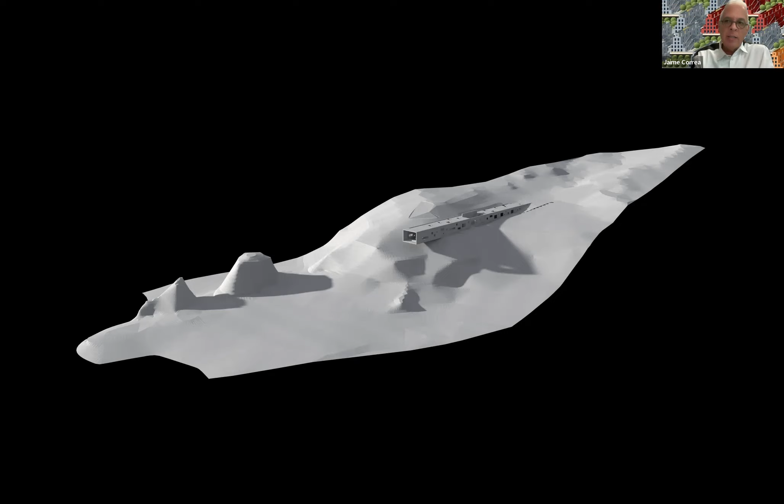Not really—I prefer to inhabit a structure than to structure a room, for example. In this case, a first project I'll show, which was not built, is a house that is, in the first instance, its structure. This is an unbuilt project, and the project is basically a structure.

And we could say that architecture is its own structure before it becomes architecture. So the architecture is really the structure before it really becomes a piece of architecture.

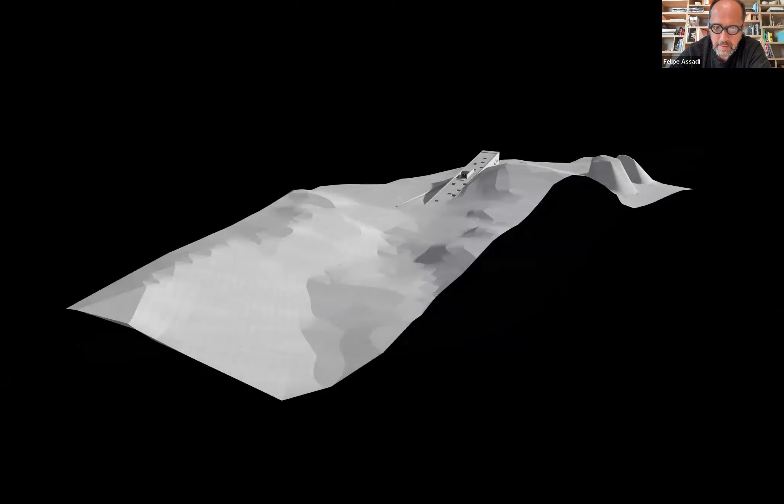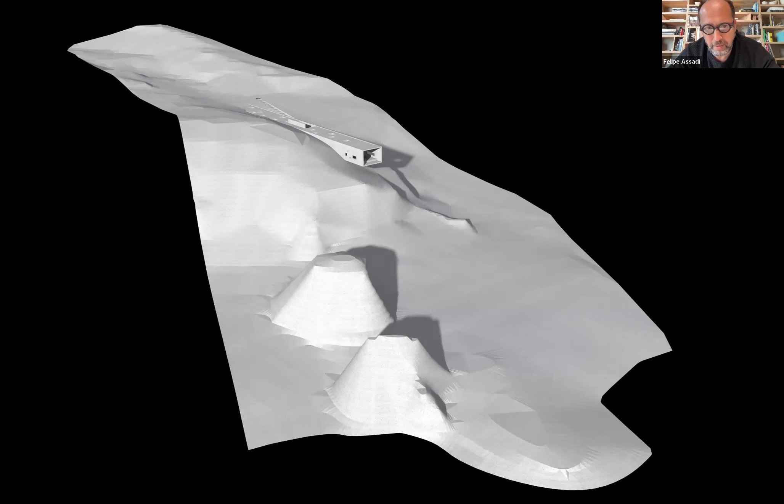This piece is made of 4 concrete faces that, joined together, form a great beam that embeds itself in the earth and flies over the landscape. Otherwise, a series of pillars would have been needed to support it, but since it is a structural beam in itself, it behaves as a single element—a piece of architecture with 4 faces of concrete that is also a beam embedded in the land, cantilevered over the geography without columns.

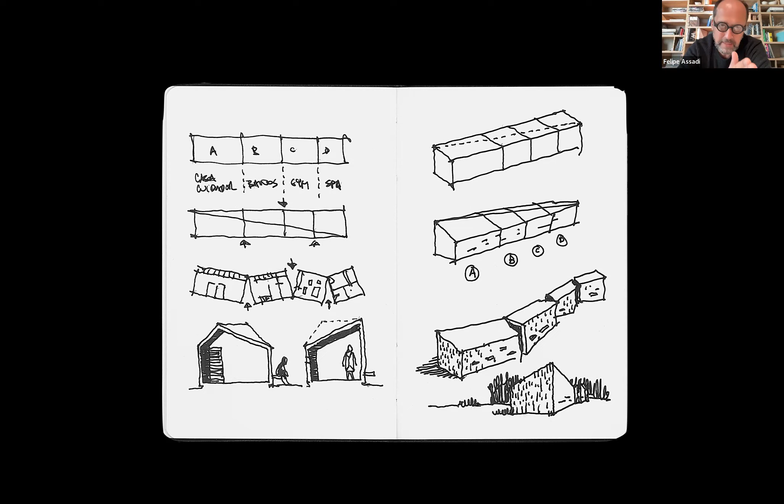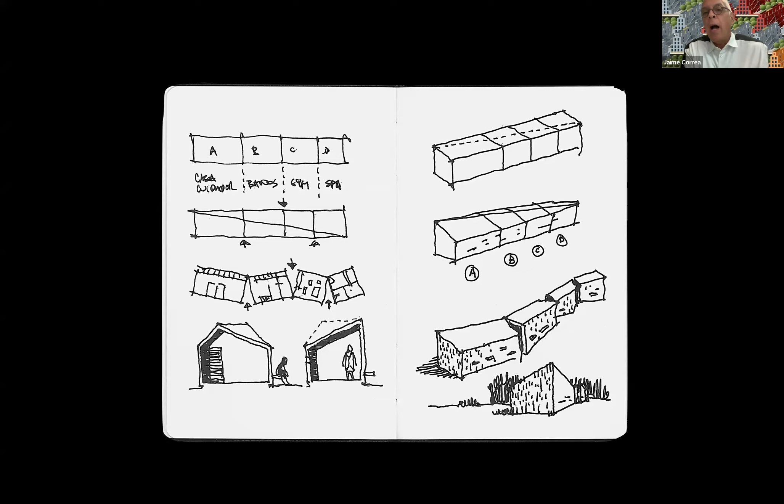Para poder entender el concepto de una sola casa con 4 cosas distintas, planteamos un pabellón con un techo en diagonal y luego cortamos 3 veces este pabellón y giramos cada parte para generar el acceso a cada una de las áreas. So there's one single house, and to be able to have it with 4 different functions, we inclined the roof and rotated 4 elements. We did 3 cuts on the general form, and through one of those cuts is how you access each one of the 4 functions.

Cubrimos el proyecto de un material inventado, diseñamos una palmeta de concreto con fibra, con un shape que hicimos para que la luz del sol en su recorrido fuese también tiñendo de sombras estos movimientos. We covered the roof with a material of our own invention, which is concrete with fiber. The result was that when the light hits the objects, it produces shades and shadows that are quite interesting.

Solo en el lugar del corte quedó el concreto rugoso, digamos, como estaba, para acentuar la idea de que fue cortado como si fuese un cuchillo y separado. So only in the cuts, we kept the concrete as it was supposed to be, as if a knife would have severed each one of these volumes.

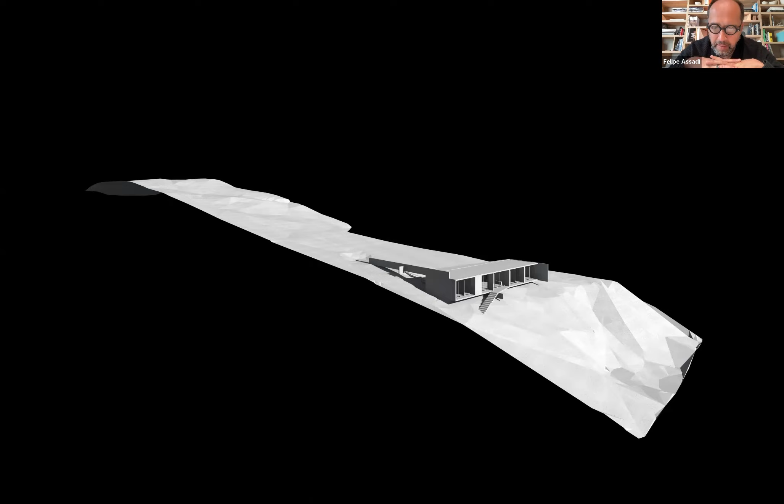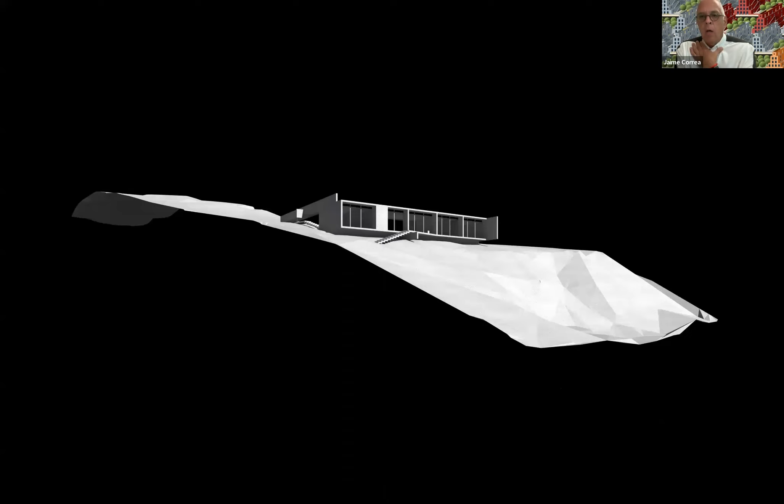This is another house in the north of Chile, very close to the ocean. The approach to the house is essential: when you arrive, you come through an esplanade, but there's a rock that drops abruptly, which gave us the siting for the house.

Entering the house was not as important as climbing onto it to observe the ocean from this unique place. There we understood that everything was connected: the roof was the lookout point for the sea, and it had to be as important as the interior of the house. So the roof suddenly became this fabulous terrace for sightseeing the geography, and the roof became almost more important than the house.

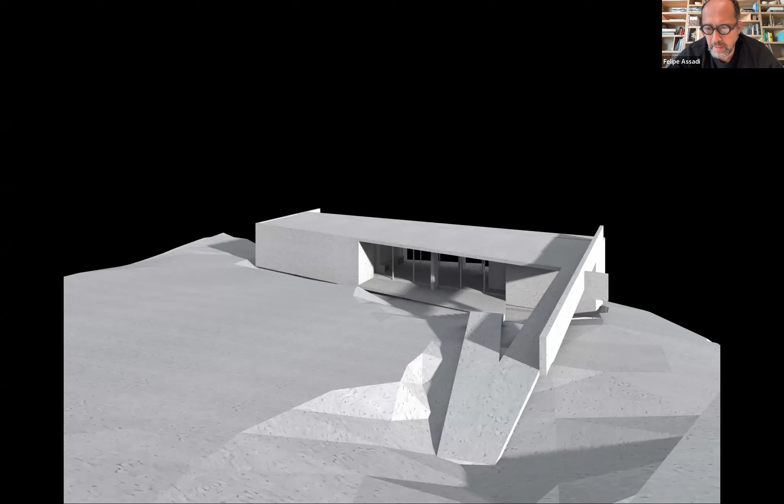Just as the places had equal importance, the elements that made them possible also had to have equal importance. In the same manner that the roof and the rest of the house had equal importance, all the elements we put into the house should also have that same importance.

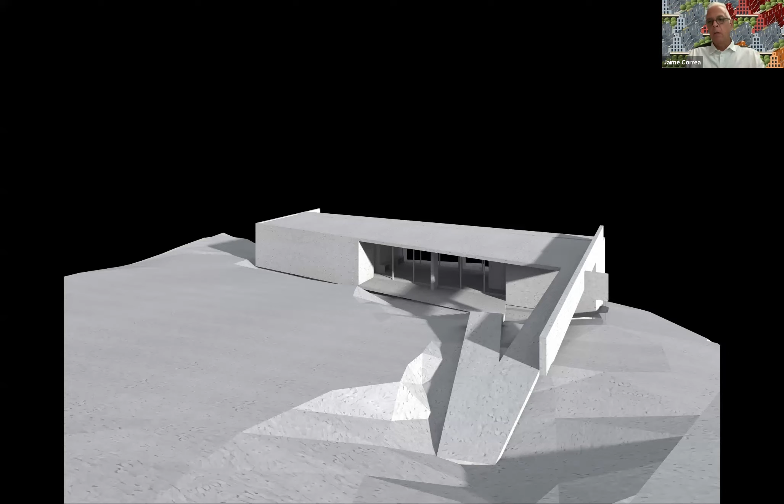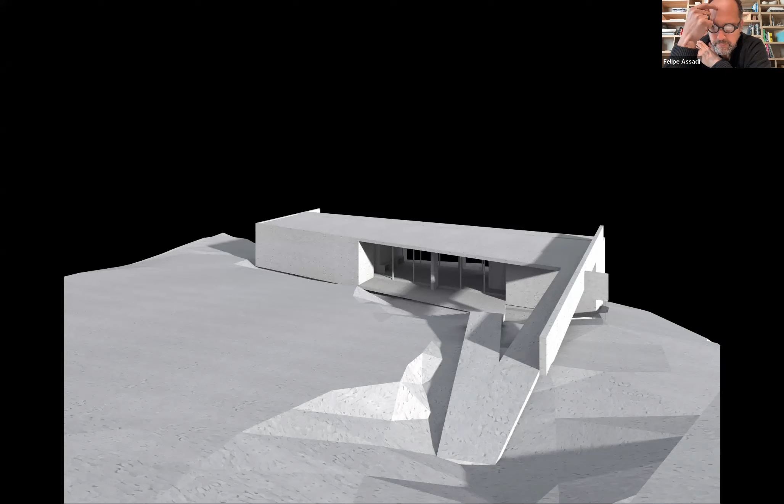So we sought a continuum between the access, the roof, and the house floor, and a common thickness for all the elements. That is, the roof slab and the floor slab had to have the same thickness, as did the bridge, the wall, and the stairs. We looked for commonalities in all the elements, deciding that the thickness of every element should be the same — the roof, the floor, the stairs, the ramp — everything had the same thickness.

But the structure does not always behave the same way for equal elements. A slab does not work the same as a wall.

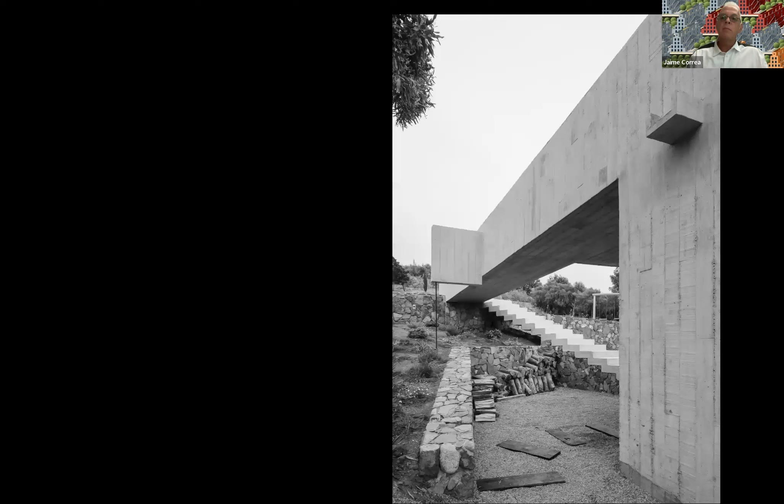So finally, the elements of the whole house are like a ribbon that go throughout the house and surround it completely.

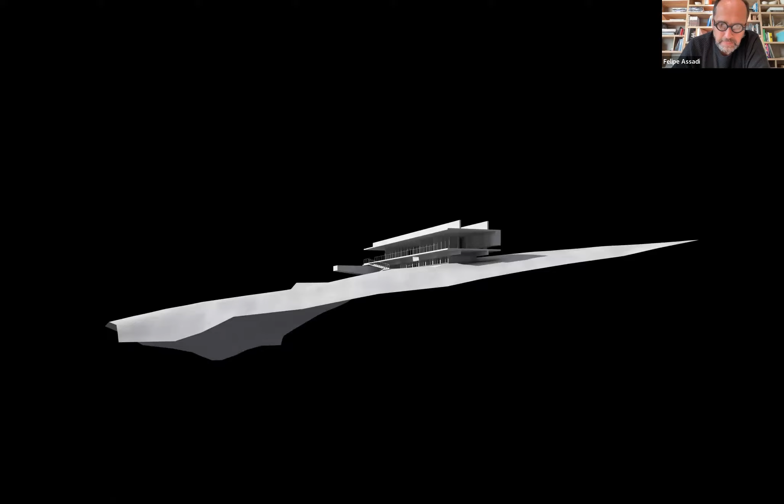To end, I'm going to show you the Casa H.

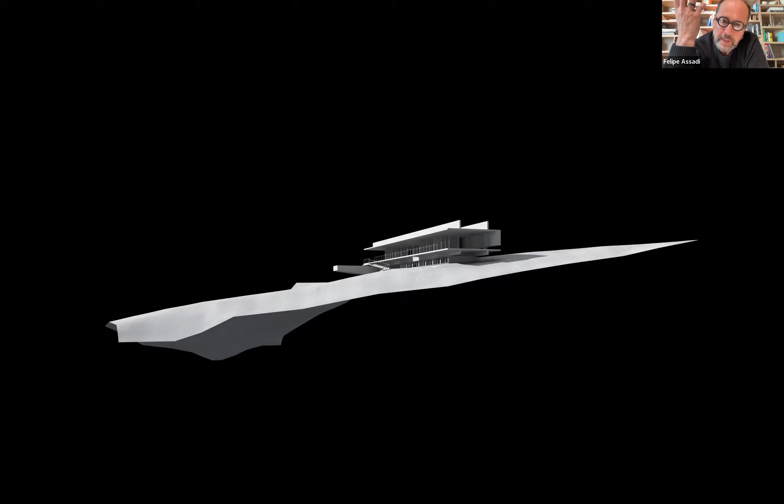So in this case, we're inhabiting a very complex structure, and the architectural project is really secondary to this object, this structural object.

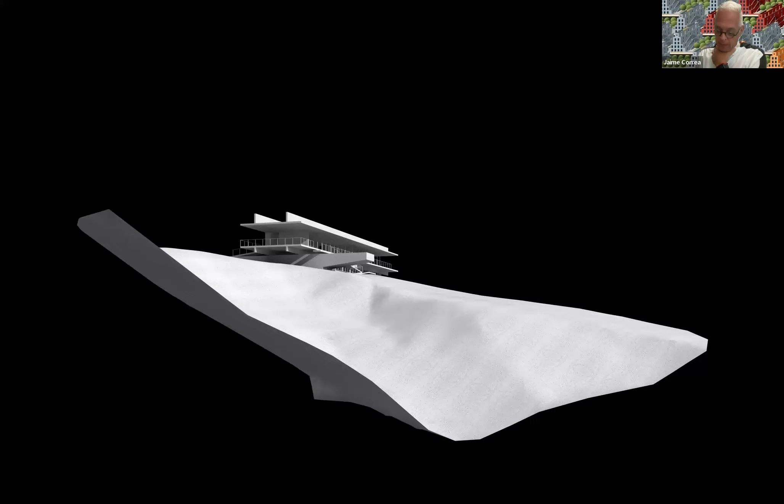But when the architecture is thought of complementary to the structure, architecture and structure became inseparable.

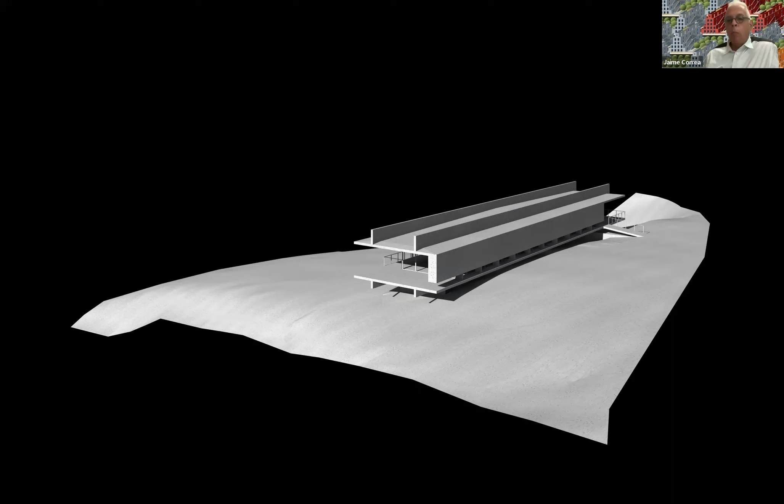And so both need to exist in a parallel realm, because when they're so close together, any modification in one will affect the other.

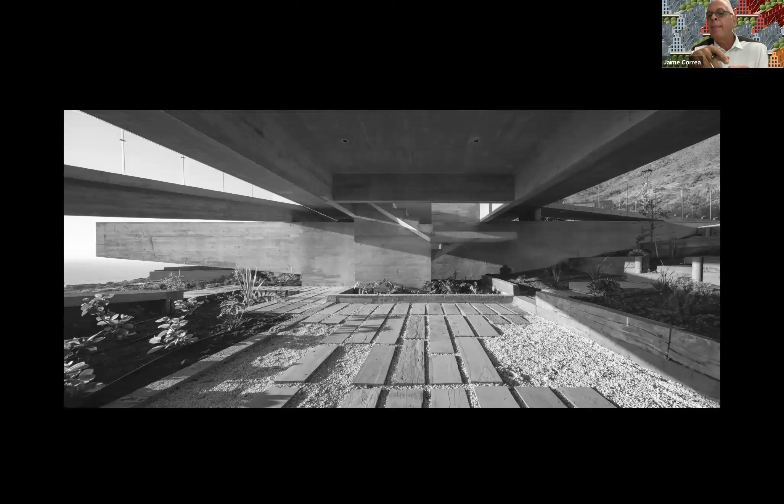In some way, they're all challenging gravity because all the elements are not placed in the normal manner in which one is over the other, but they're all cantilevering somehow and making you perceive that the objects are independent and that they're all floating in the mountain.